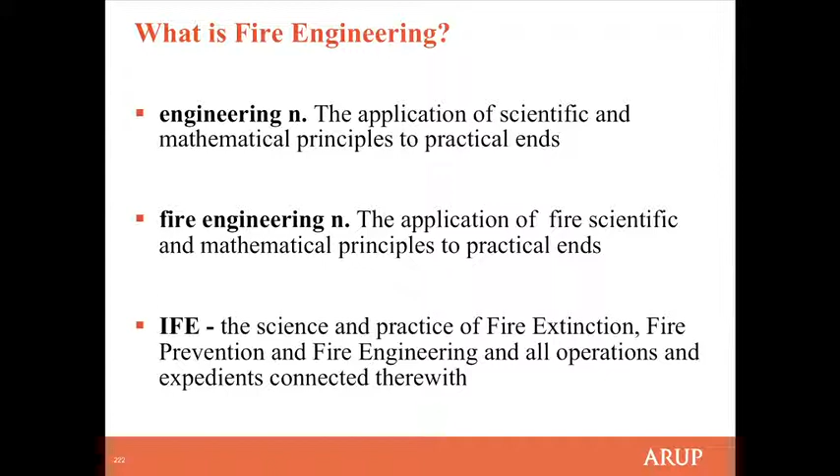So I thought I'd start with what is fire engineering. I looked up some dictionary definitions of engineering, and it's about the application of science. Basically, the same can be said of fire engineering. It's about taking fire science, fire principles, and applying them in real-world situations.

But what we often have at the moment in the world of fire engineering is the concept that there are 2 approaches you can use: a prescriptive approach or a fire engineered approach. You can just follow the guidance, or you can actually start trying to apply some science.

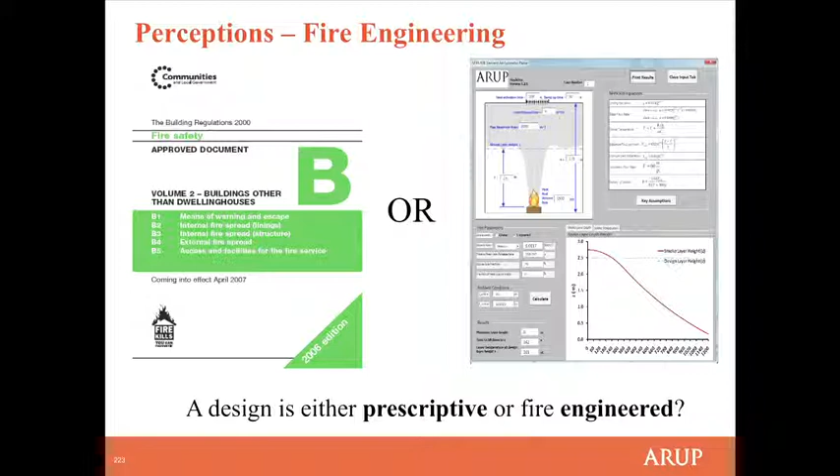And those 2 distinctions allow some comparisons to be made. The sorts of comparisons I often hear: prescription is simple, it's conservative, in other words safe, it's quick, it's low risk in terms of obtaining approvals, and prescriptive buildings are easier to manage because they don't contain complicated fire-engineered systems. The converse is true of fire-engineered buildings: they're complex, they're trying to reduce safety because that's what we do as fire engineers, isn't it? There's an inherent design and approvals risk, and they require special management.

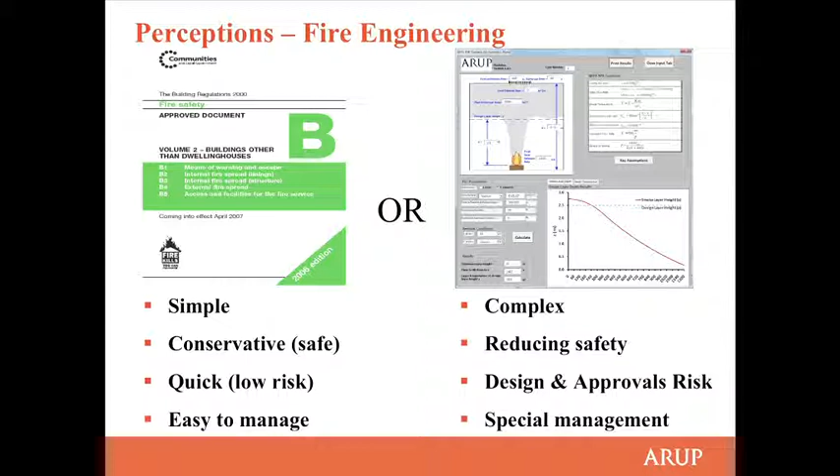And of these fires, when you look at them, most were avoidable through simple good design practice. It didn't necessarily have to cost any more. It just needed people to make the right decisions at the right time and put the right systems into the building. So they weren't fire engineered, but in my view, they should have been well designed, and we should have been applying the right thought process and the right design process in the development of the fire strategy.

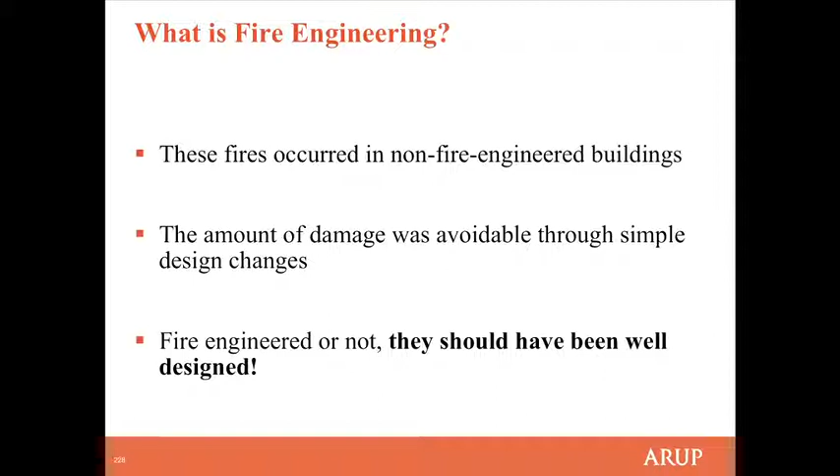So the first message I'd like people to take away from today is adopting prescription doesn't negate the need for good design. You still have to think about what you're doing. The prescriptive guides are there for the more common types of building. You need to determine whether your building is a common type of building, whether that includes the typical demographic of people, whether there are the normal sort of fire hazards, whether it's being built out of what would be considered common construction methods. You still have to apply that thought process rather than just simply reading things from a book.

I've got some examples here where Arup have done things differently from the prescription, because we felt the prescription wasn't meeting the needs of the building or the client. The first one is the Leeds Arena. There are 2 things about this building. The prescriptive guidance would say the roof structure could be unprotected, since it was really there only to support the roof, but in our view this building is almost essentially a roof — a big, large roof over a large number of people — and actually losing that roof is not really an acceptable outcome from a fire event.

So we actually decided that it's not acceptable just to assume that that roof can be unprotected, and we looked at all the different types of fires that you might have in that building and worked out which elements need to be protected. There are still a lot of unprotected elements in there, but those that could be exposed to a severe fire are actually protected to prevent damage occurring.

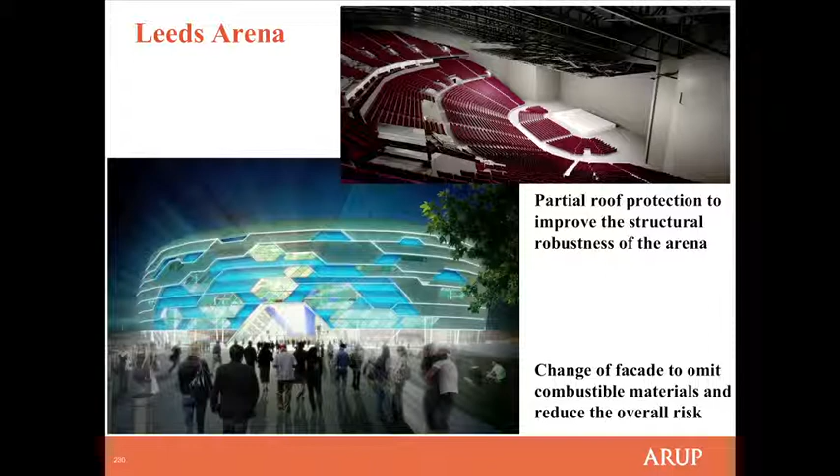It would probably have complied with the requirements of the building regulations. However, our view was if you got a fire in that facade for whatever reason, the spread of fire would be so rapid through the building, reputational damage, all of those sorts of things that need to be considered would just be unacceptable. And we had to work quite hard with the contractor to convince them actually they shouldn't be using this material. In the end, they saw where we were coming from and decided it was also in their best interest not to use the material that was being proposed.

Here's another very simple example. In this particular building, the fire strategy, for whatever reason, was trying to divide the building into two compartments, Zone 1 and Zone 2. And the fire strategy relies on fire spread not occurring between Zone 1 and Zone 2. So if you look at prescriptive guidance, we put the compartment walls where the solid red lines are shown. You take them up to the edge of the building, and that's fine. You don't need to think about it anymore. So we could move on.

However, what about a fire that's located in that room and it's spreading actually across the courtyard through radiation? The code doesn't necessarily require you to consider that, but the science and the physics is that it can happen. So you need to be aware of that, and if your strategy relies on it not happening, you need to prevent it from happening.

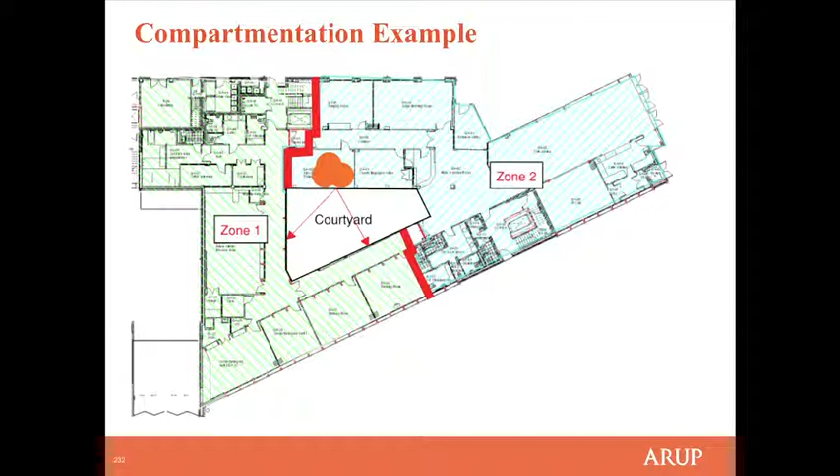Okay, so when to use fire engineering? We've seen some of these iconic buildings, large tall buildings, Olympic event buildings, some of the more complex buildings where I think are often associated with fire engineering. However, my experience is that actually many of the smaller buildings offer equally and interesting challenges.

But actually, more importantly, is if we ask the question, rather than when should we use fire engineering, we ask the question, when should we use good design? Surely that's in all buildings. And so really what I'm advocating is, it doesn't matter the scale of the building, the expertise that gets applied and the thinking and the design process must be commensurate with that building. And so fire engineering applies to some extent in all buildings.

What about in the timeline of a building? Often, or in my experience, fire engineering and fire strategy writing and development happens in the design stage. And actually, I pulled out some typical scopes of services for fire engineers, and we even tell people that this is where fire engineering is done. And quite often we go through a scope and we get to the end of something like stage E, where the detailed design is done and it's handed to a design and build contractor, and the fire engineering scope sort of becomes ad hoc advice.

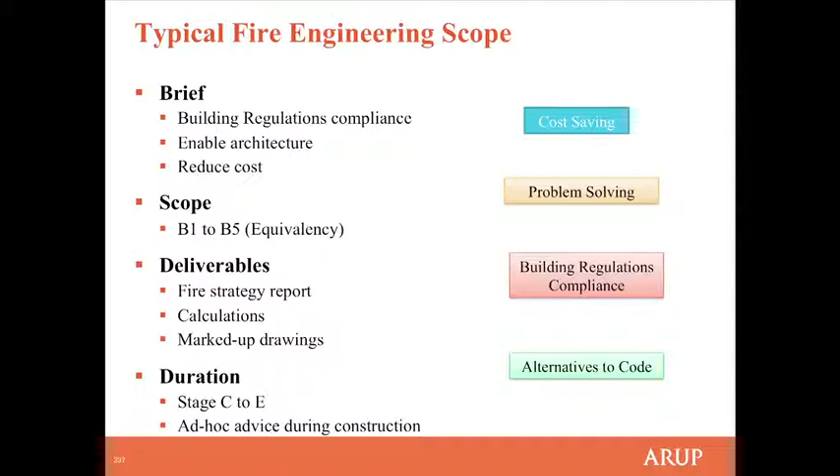But when you actually think about the problem in hand, what we need to do is we need to have a successful outcome. We've got to think about the preparation, engage with clients and stakeholders. What do they want out of the building? How do they want to use it? How are they going to operate it? How are they going to run it? What fire safety management procedures are they going to have in place? Therefore, how must we design it to meet that needs?

Once we've designed it, how must we specify it to make sure that actually what was designed was built? We must check that what was specified is actually built. And then we have to monitor and maintain and run it and operate it in accordance with the way that we said we were going to, and the manner in which the design is based upon.

So again, it's a non-linear process, really. We've got to think of it all the way around, and the fire strategy is integral in all of those stages. So once again, we have to apply the right skills at the right time throughout the process, not just in the design stage.

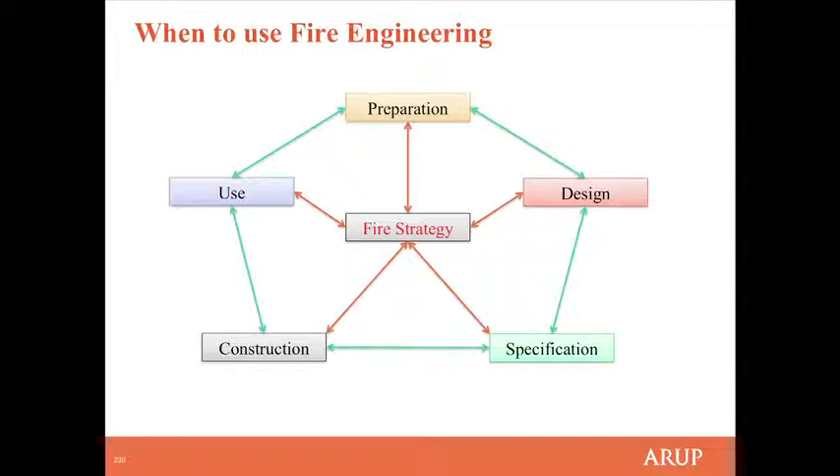And again, some examples here just to make that point.

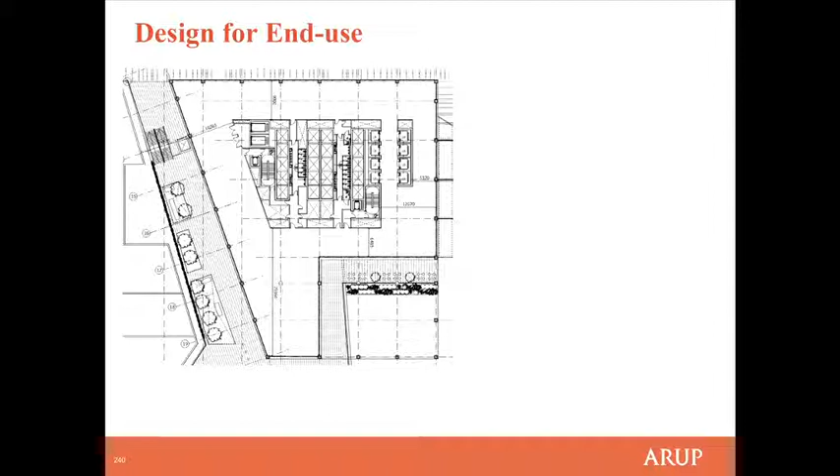Often the code or prescriptive requirements for mobility-impaired escape, wheelchair users, you provide a wheelchair refuge in the stair, and there'll be assisted evacuation by the operators of that building who might do a carry-down facility to take those people out of the building. But this begs two questions: how do we know one wheelchair space is actually enough? How many people are there likely to be on that floor using wheelchairs, and have we incorporated enough space for those people?

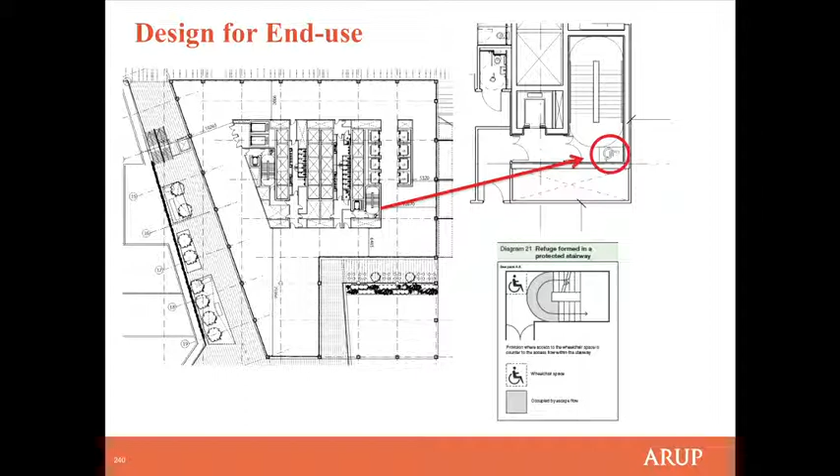We're finding more and more clients don't want to, or actually refuse to, ask other members of their staff to effect a carry-down, in which case that strategy doesn't work. We have to know what our clients want to do and how they're going to run the building so that we can design it correctly in the first place.

Here's an example about specification. One of the things we do in fire engineering when doing calculations is calculate the amount of vent area required to allow smoke to vent out of the building. We'll come up with a free area, or a vent area, and we have to be very careful what we mean by that, because if we ask for 30 meters squared of vent, the vent manufacturer might say, well, those windows add up to 30 meters squared, therefore 30 meters squared of vent. But what we actually mean is the free area of vent through which smoke can flow out. So if those vents only open 30 degrees, they're only about a third of the free area of the actual opening.

I've seen this time and time again where there isn't enough vent provided because of an imprecise specification of what we actually want.

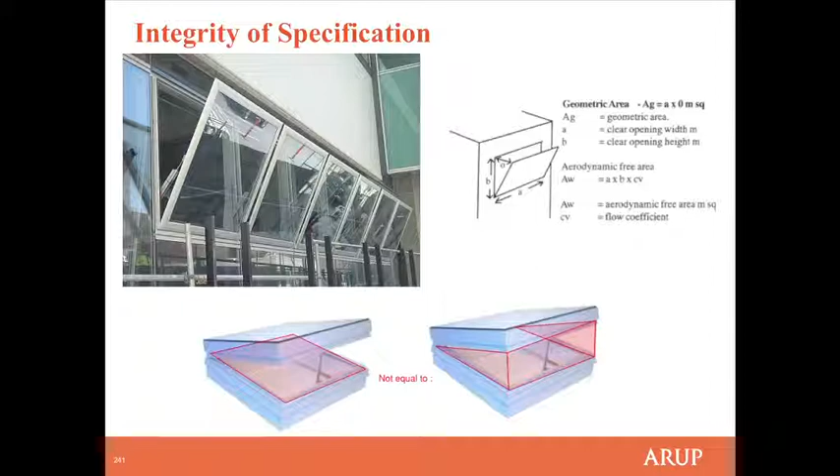Another example of the disconnects that can occur. In this particular building, these black dashed lines are compartment lines required for compartmentation, and the red lines indicate where there's glazing. That was specified as 60-minute glazing, and sure enough, the glass was bought and they got 60-minute glass. Then the window installer got the glass and installed it in their window frame. But the frame used here is a softwood frame that gives no fire resistance at all. So you've got this beautiful 60-minute glass in a 60-minute wall, with a frame that's going to fall out at the early stages of a fire, leaving a gaping hole in your compartmentation. In this instance, they've had to take out all the frames and reframe it in hardwood to give the required fire resistance.

So again, it's about thinking the process right through, ensuring you're specifying correctly and that what's being put in is actually correct.

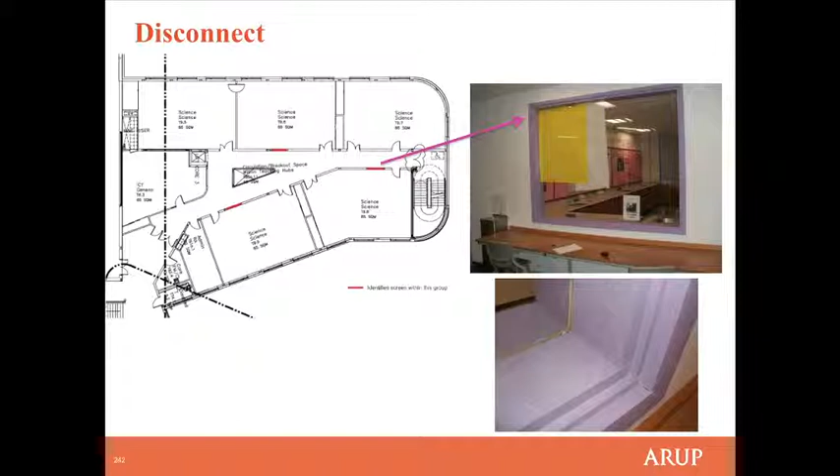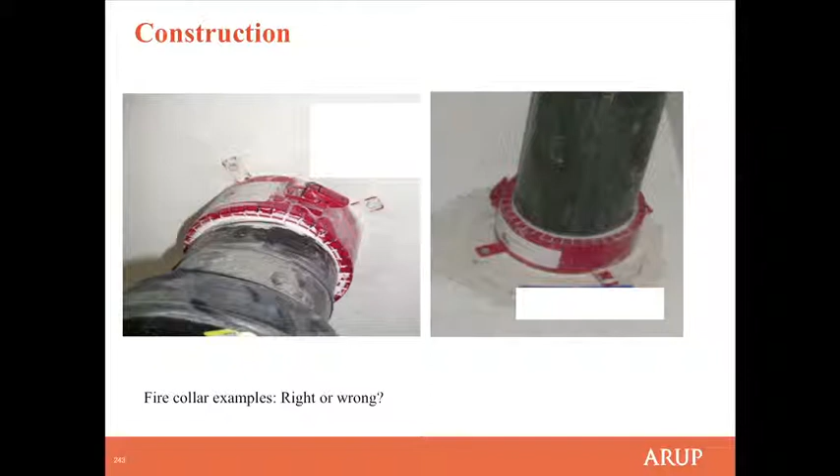Some more examples: fire stopping installed incorrectly, which we see all too often. What I find interesting, particularly in some of these later pictures - and I'm no expert here, so I couldn't tell you exactly what's right and wrong - is that to a layperson, the two on the right certainly look about right to me, but they're not. So it's important that the right competency is applied through the process so you know fire stopping is being put in correctly.

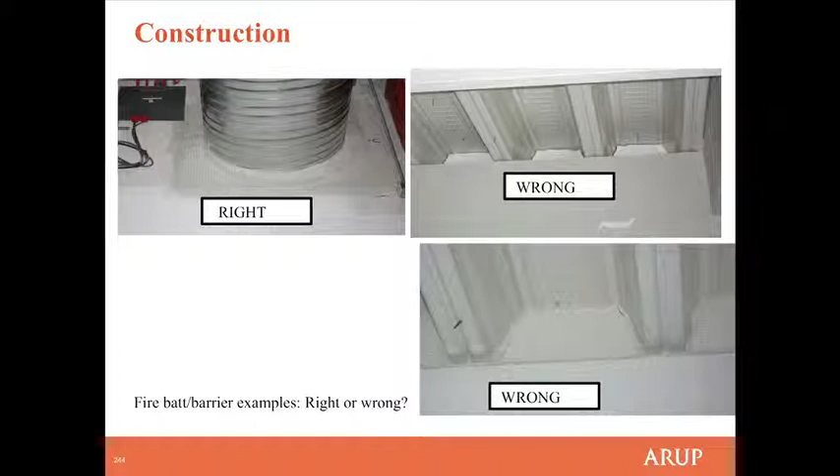What's the point of going through this whole design process of specifying and thinking about the fire strategy when it's not being built correctly? So, message two: total fire engineering, a concept and terminology we use at Arup, means good design, construction and operation. We've got to go right the way through the process and get it all correct for the whole thing to stack up.

Okay, so why use fire engineering?

Fire engineering services need to enable our clients to achieve their aspirations and requirements. It goes back to engaging with them early, finding out what they want to get out of the building and allowing that to happen. We need to give consideration to the design and construction phases, and we need to add value to our projects, but that value can manifest in a number of ways.

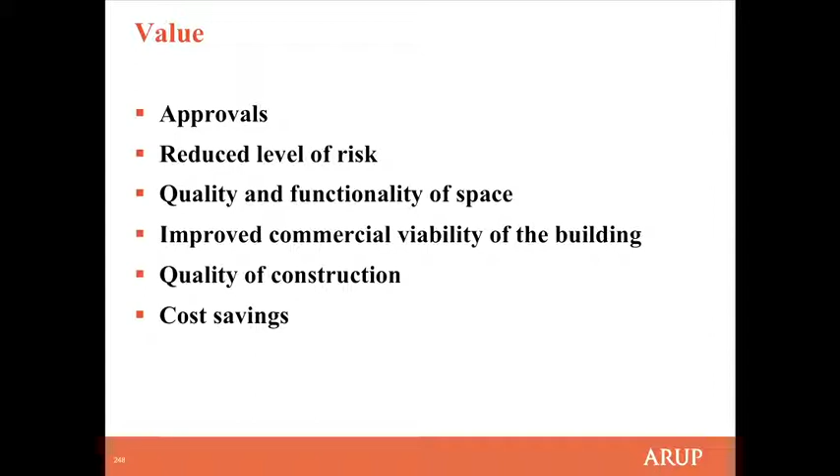I've listed a few here, but there's a whole bunch of things. The important thing is it's not just about cost savings. There's legislative compliance, protecting clients by making sure they're complying with legislation, and reducing risks within buildings. We can improve quality and function of space, improve commercial viability of the building, and ensure clients are actually getting the quality of construction they've paid for.

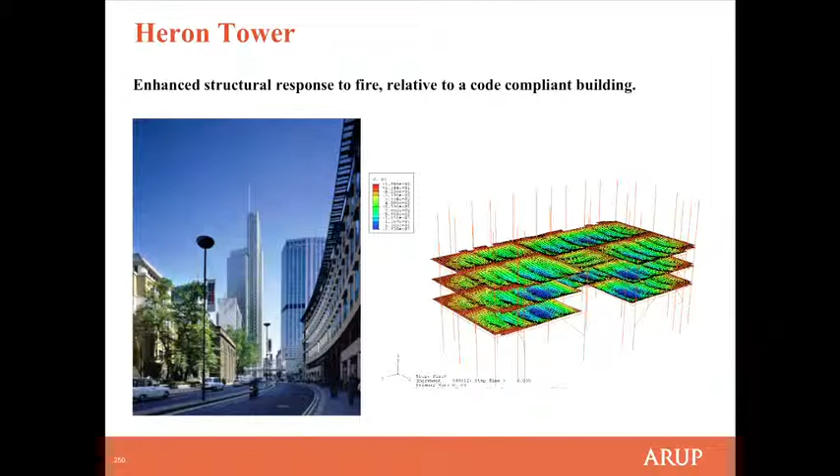Going through a few examples, Heron Tower was characterised by what they called a village concept, where villages comprised 3 floors interconnected, with little mini atria connecting the stories, the idea being to let to tenants who wanted to take up 3 floors with connectivity between them. It occurred to us that a 3-story fire was a real possibility that needed consideration, so we did the full analysis of a fire on 3 floors to see how the structure behaves and show it could survive the fires it might be exposed to. That's an example where we went quite a bit further than what the code would expect, which is just applying 2 hours fire protection and forgetting about it.

This example is about a series of projects we've done with a client in Manchester. On some of the earlier projects, that client, a developer, was very interested in the capital cost of the building and really wanted us to reduce that as much as we could. We asked, 'Are you sure about this?' and they said yes, so we went along with that approach. One thing we managed to do was eliminate some of the lifts from the building. Subsequently, having built it, the client found the building was less easy to let, because the lifts we eliminated could have been used to evacuate wheelchair users, and now potential tenants were being asked to effect a carry down, which they didn't want. So our client saw this as narrowing their market of lettability — yes, they've got a cheaper building, but it's less easy to rent to the market. Now when they come to us for fire engineering, right at the top of their goals and objectives is to improve marketability and lettability of the building, which often means putting in more than what you actually have to comply with legislation.

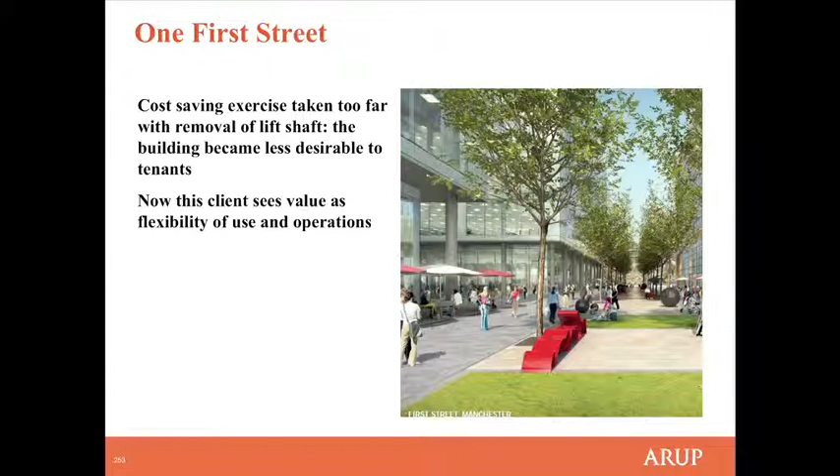So, third message: it's not all about cost saving.

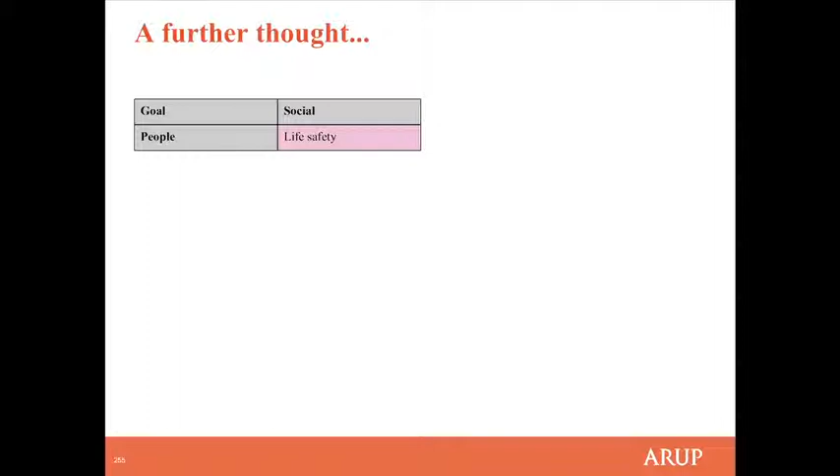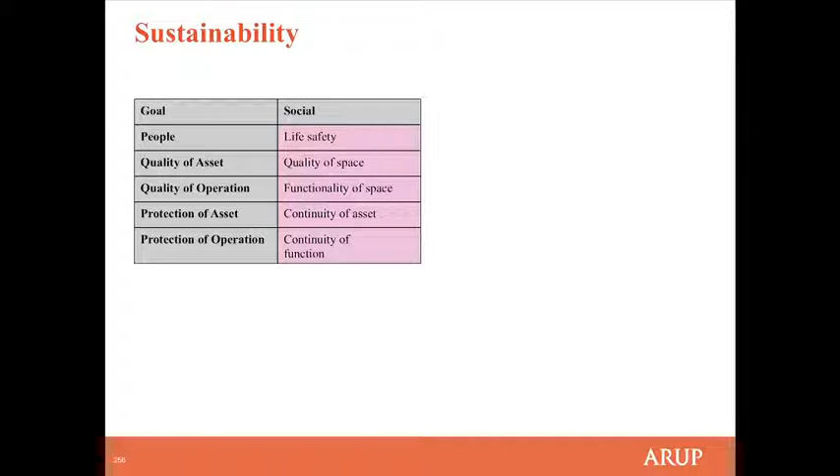We're getting there — this is just a bit of a tangent. When we often think about fire engineering, we think of it as life safety, with the goal being the minimum standard required for life safety. Sometimes people go further and ask for a particular quality or functionality of space, and sometimes they'll ask for reduced capital cost or reduced operational cost of the building.

But our view at Arup is that we actually need to start thinking and engaging in the sustainability debate, and the way to do that is to express goals in terms of social, economic and environmental objectives. What we need to really start thinking about is the total cost of fire over the life cycle of the building, where the total cost is the cost of prevention, cost of protection, and cost of occurrence. So we're balancing the amount of protective measures we put into a building versus the change in damage that would result from a fire with those protection measures.

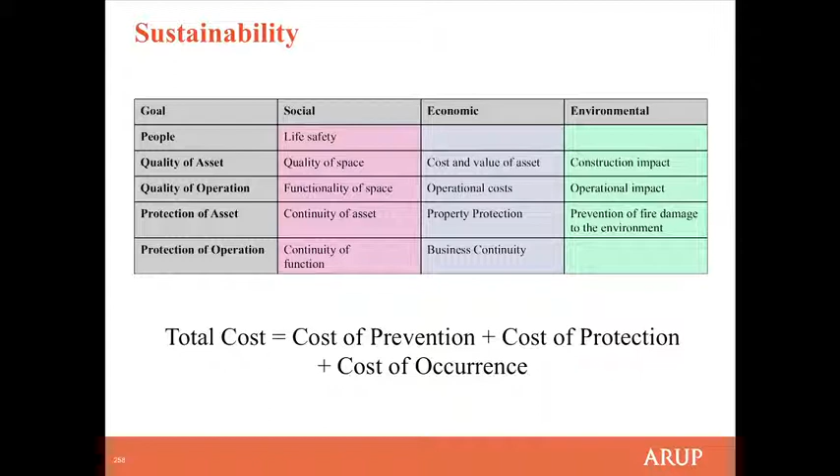It's only once we've got that balance right, minimizing the total cost, that we can be sure we're getting the most sustainable solution. When I say cost, it doesn't have to be financial—it can be social, economic, or environmental cost. It's a really easy equation to write down, really difficult to solve. We've got work to do to answer all these questions, but I believe that's where we've got to go, otherwise the sustainability debate will pass fire engineering by, and we need to engage in that. So message 4: we have to start addressing the total cost of fire on sustainability.

Getting into the final bit, who to use for fire engineering. A colleague of mine attended a Royal Academy lecture for engineers about engineering ethics in practice, and they came up with four main pillars of ethics in engineering. One of the top ones was accuracy and rigor, and within that was effectively a statement that it's not ethical to work beyond your competency.

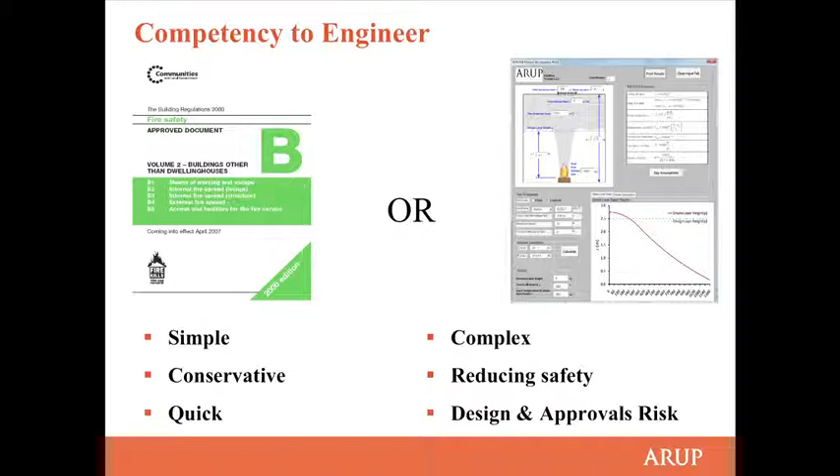So I got thinking about that in terms of fire engineering, going back to the beginning with this sense of prescriptive or engineered, following code or applying science. I think the important point is it doesn't matter which one you use—there's value in informing the design process either way. But the most important thing is using the right competency for the problem at hand, all the way through the process. It's not just about design—it's the right competency during specification, construction, and use of the building.

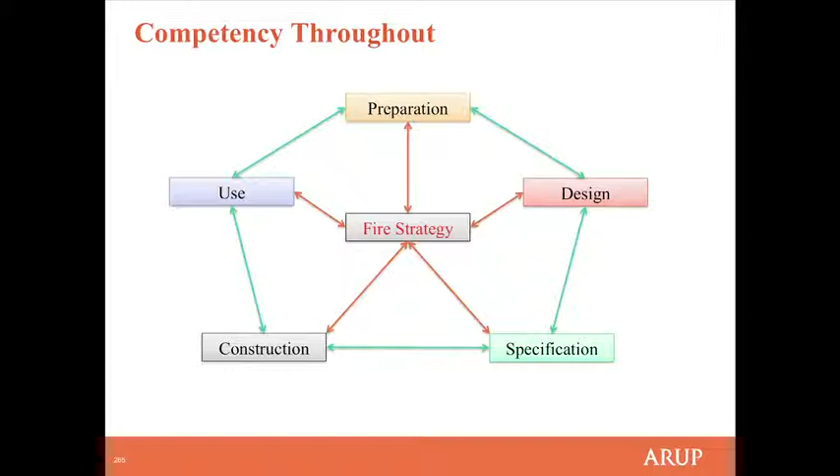I also looked at papers from Margaret Law about competencies required for fire engineers: education, training, knowledge, awareness, experience, research and development, and intellectual toughness. She asked back in 1990, what makes this list different from any other aspect of engineering? We expect structural engineers to design buildings that way—we must expect the same of fire engineers. Her conclusion was that there is no difference, only that with fire safety engineering we've got to keep spelling it out.

And it still feels a little bit like that—we've still got to keep spelling out that simply having a prescriptive code people can follow is not a panacea. We have to have the right competencies behind that. So message 5: competency, competency, competency.

So that's about it—just some closing remarks to summarize: the what, when, why, and who. Fire engineering is not necessarily just the application of science, but the expertise required regardless of the situation. It can apply to simple or complex buildings, but importantly needs to be present from inception through to operation. Why? Quality of design, innovation of design, efficiency of design, as well as, in many cases, cost savings.

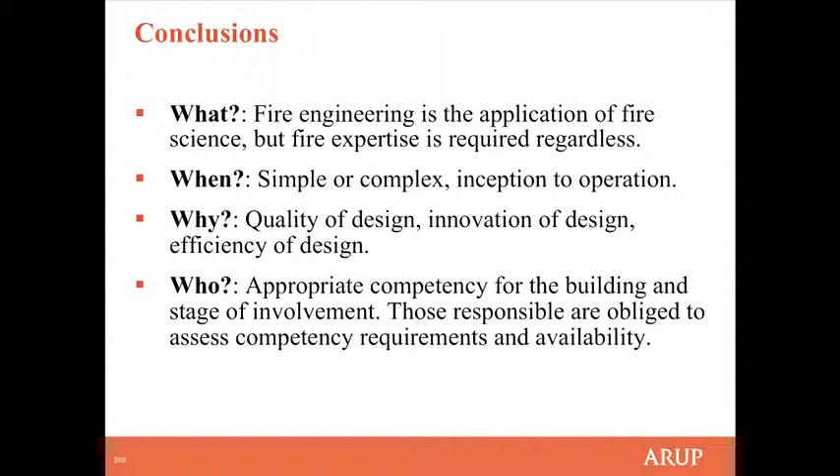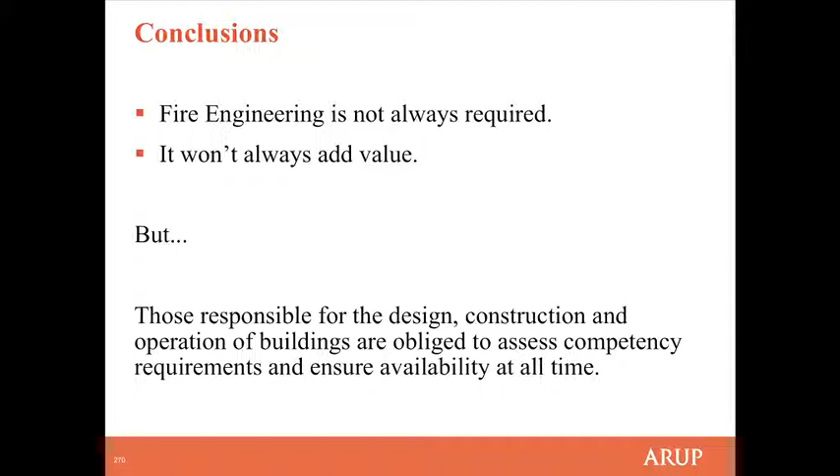Sorry, I'm repeating a little here. Fire engineering is not always required. My messages: following prescription does not negate the obligation for good design. Fire engineering is about the whole process. Value goes beyond cost saving. We have to start assessing the impact of fire on sustainability, and the appropriate competency must be provided throughout.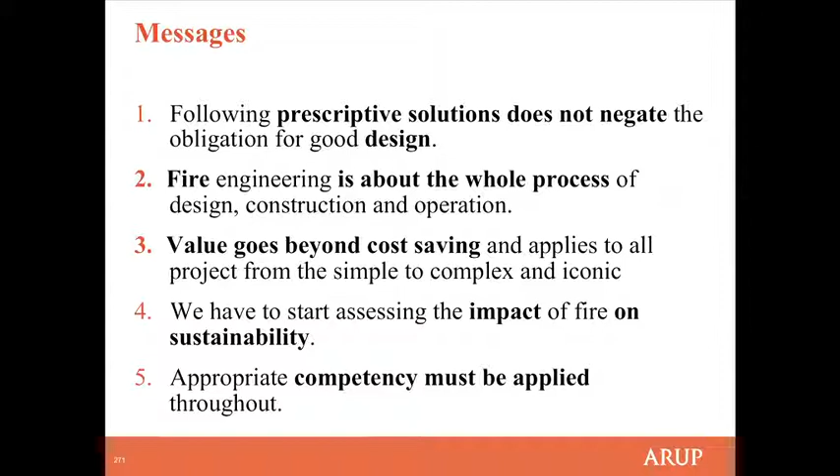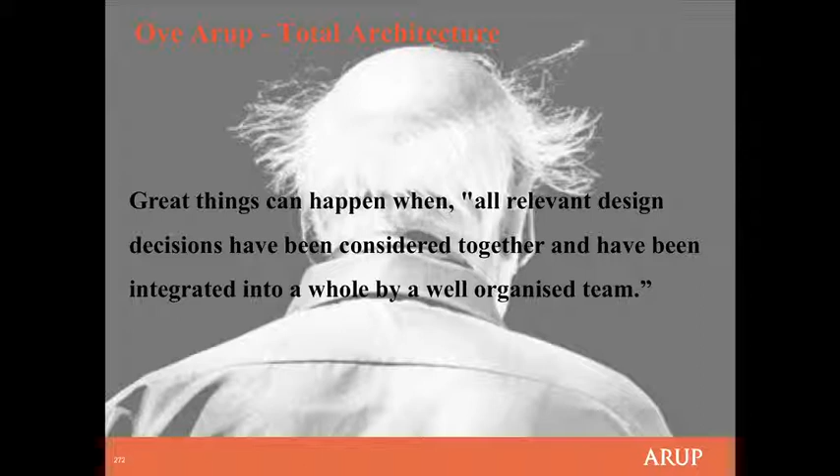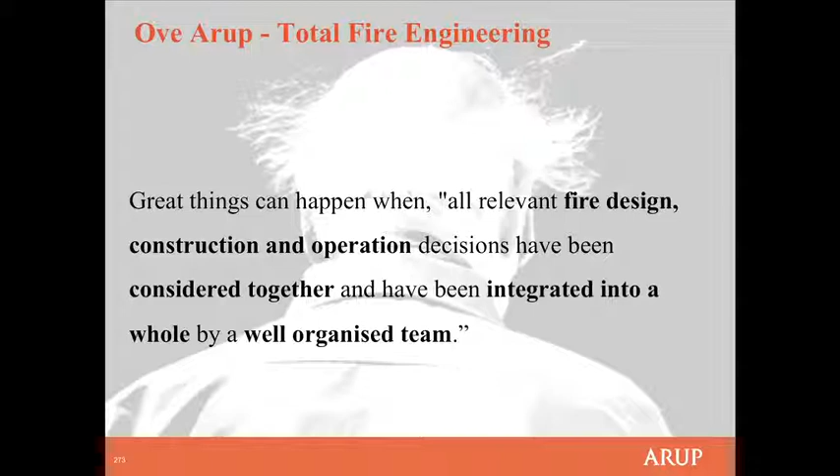I find myself finishing with this slide quite often in presentations I give. Ove Arup was quoted as saying, a long time ago, that great things can happen when all relevant design decisions have been considered together and integrated into a whole by a well-organised team. I think inserting the word 'fire' on the first line, you couldn't say it better—that sums up what I think is required and what makes a good fire engineering design. So thank you very much for your time.